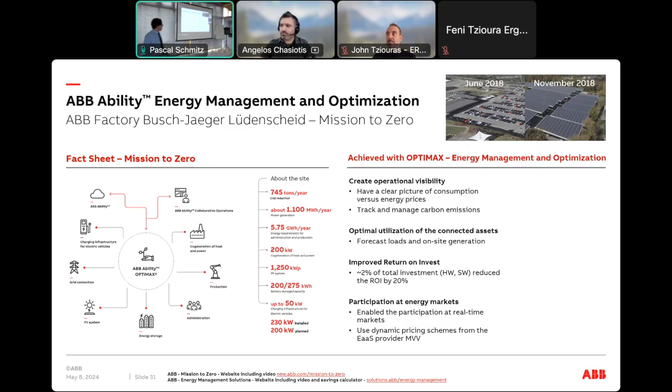Okay, so this section was about energy efficiency and how we want to optimize our energy systems. ABB is talking about digitalization and adding sensors and monitoring systems, but what I want to talk about is how we could optimize other aspects of the process. For example, how we can insert circularity and sustainable development into our optimization process.

So what I want to talk about here is how we can couple energy optimization with decarbonization, of course, with the sustainability pillars, and how circularity comes into play in energy efficiency. And then we will look at each energy system of the Neutron project specifically and try to see how we can optimize every system in terms of its sustainability pillars.

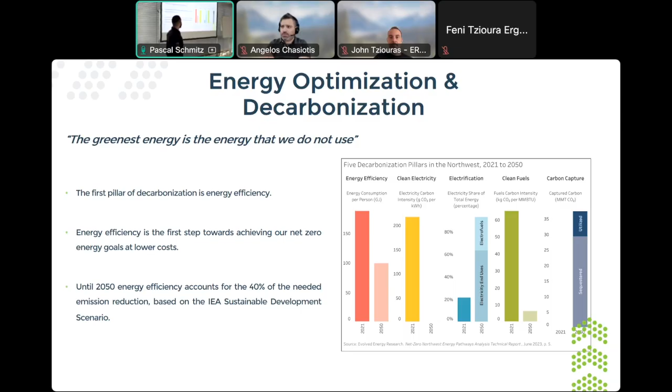So what I want to show here is that we don't only need sensors and digitalization to optimize our system. The social aspect plays a huge role in optimizing our processes. For example, if we have social education and social involvement in our project, we could decrease the energy consumed by the households, and then we can reduce the size of the proposed system. This reduces the cost, reduces the carbon footprint of the initial installation, and also reduces the energy consumption of the household itself.

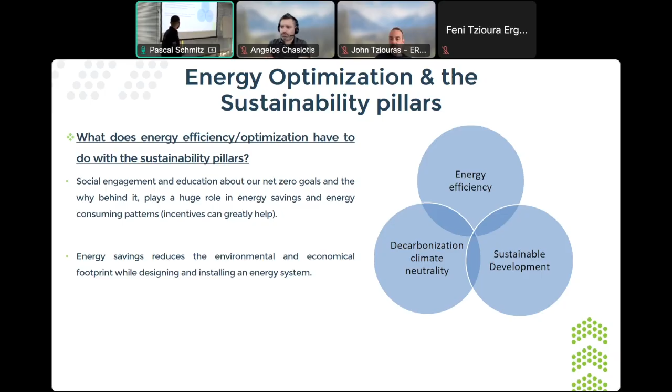And about circular economy, I think the circular model itself is a way to optimize the energy system in general. So reusing energy that was not used and was thrown away, having industrial symbiosis, for example, taking the output of a sector and having it as an input in another sector. The most simplistic form of sector coupling is waste management and energy production. So taking the waste and utilizing it as a source to produce energy.

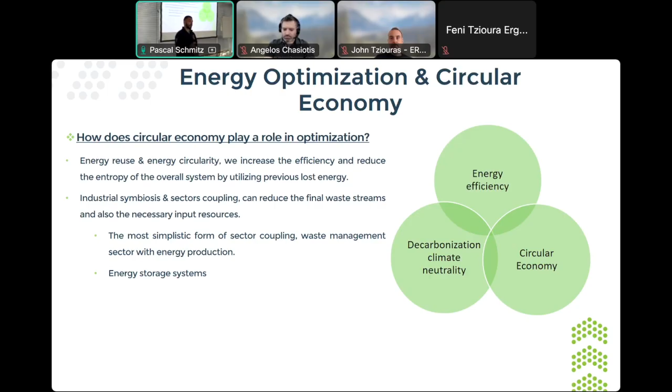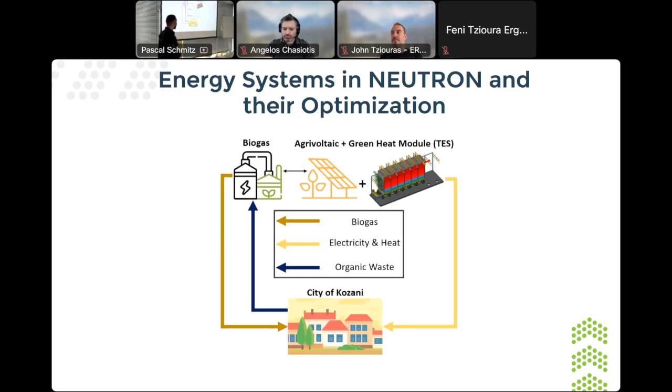Okay, so this is the proposed overall Neutron energy systems. Here we can see we have the biogas that we're talking about in work package 2. We have the agrivoltaic system plus the green heat module along with potential grid integration. So we could provide electricity to the city of Kozani, and if we have the available organic waste streams of the city of Kozani, we can then produce biogas. And of course, this biogas will be turned into heat and electricity as well. I tried to make the diagram as circular as possible because this is what we're trying to achieve here.

So if we go into every energy system specifically, what I want to show here is, of course, we can have a technical optimization in terms of the design. For the agrivoltaic system, we need to see the height at which we will install the PV. We need to see the number of strings. We need to see the distance between the strings, so we will have the needed solar radiation for the plants, for the cultivation. We need to see which cultivation is optimal for the shadow that we will have between the PVs.

And for the social aspect, what I wanted to showcase here is that if we want to optimize the potential of the overall system, then we need to have an energy community utilizing the cultivation below the agrivoltaics, because this means jobs in the local area, and this is also money given back to the people of the city of Kozani or any other city where we could utilize this sort of system. And to further increase the circularity of the whole system, we could utilize the crop residue of the agrivoltaic system in the biogas digester that we propose implementing.

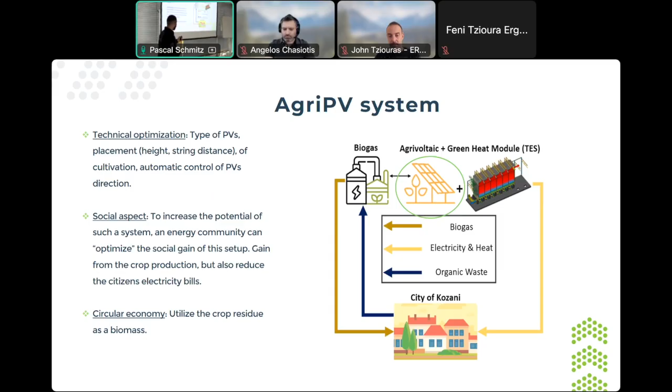Moving on from the agri-PV system to the biogas production. In terms of technical optimization in the design phase, what we could do to produce more biogas is study or assess the carbon to nitrogen ratio from the available waste streams that we have. So we will have the most optimal production in every digester that we design.

In terms of the social aspect now, this is a huge topic. If we take the organic fraction of the municipal waste and we assume that we want to utilize this type of waste for biogas production, then we know that wrong disposal, for example throwing plastic into the bins meant for organic waste, contaminates the waste. And what happens there is that in most cases, we cannot utilize this waste for biogas production or even for compost. In some cases, we can still utilize it in incineration plants, but we know that in Greece, we don't like burning waste. I don't know if this is a good thing or a bad thing.

But if we increase the social involvement and the social education, we can optimize the process of waste stream utilization. So if we could add some incentives for the people of Kozani or any city to throw away the organic fraction and only the organic fraction, not throw in plastic without caring about the process itself, then we can increase the potential biogas production from the organic fraction.

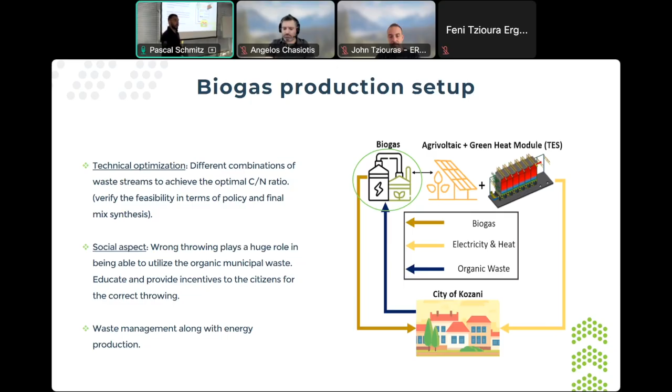So unfortunately, people have to go there and just rip the bags one by one so they can take the plastic out. And even then, we will have microplastics inside the organic waste. This cannot be utilized for biogas production or even for compost, at least for an efficient amount of compost.

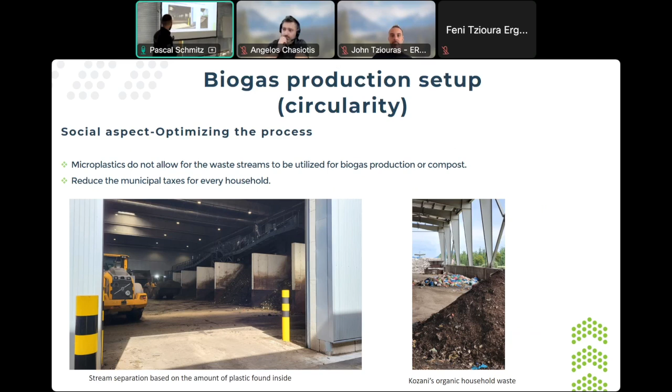Now moving on to the district heating system and the green heat module. In terms of technical, I'm not the right person to say this, but I think we had a really fruitful discussion before about this. What I wanted to showcase here is the social aspect.

Again, if we have informed citizens about what they will gain in, for example, increasing the energy efficiency of their houses, so saving heat, saving energy in general in the households, the first outcome would be that they would reduce their bills, of course. But the second outcome would be that if we want to, let's say, install a system like the green heat module, the overall capex and the overall carbon footprint of the installation would be reduced.

Because if we had a heat demand of, let's say, 10 units, and then we employed some energy savings in the households, for example, insulation or the windows and all that stuff, we could drop this down to, for example, 8. So then we would need to design a system for a reduced amount of heat demand.

And yeah, if we want to continue into the circularity of the system in the Neutron project, what we could discuss here is that the green heat module couples the two sectors: the energy generation sector and the heating demand from the households. So we can produce an extra demand for electricity that is not being used.

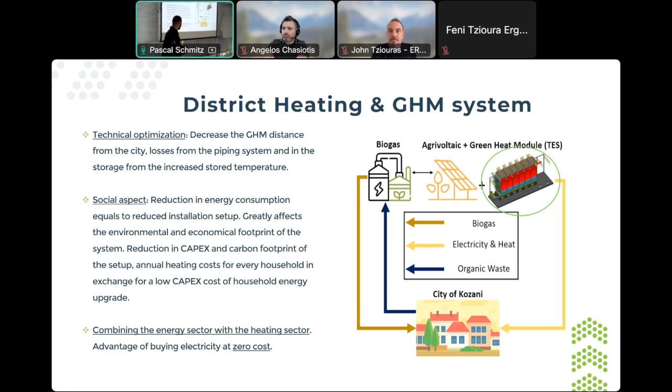So by optimizing the system and coupling the two sectors, we can basically increase the end user utilizing this electricity, buying the cheap electricity, turning it into heat and providing it to the households. This will not only decrease the cost for the households. So if we say that the current cost for the heat inside the household is 5 units, then we can decrease this to lower than 5.

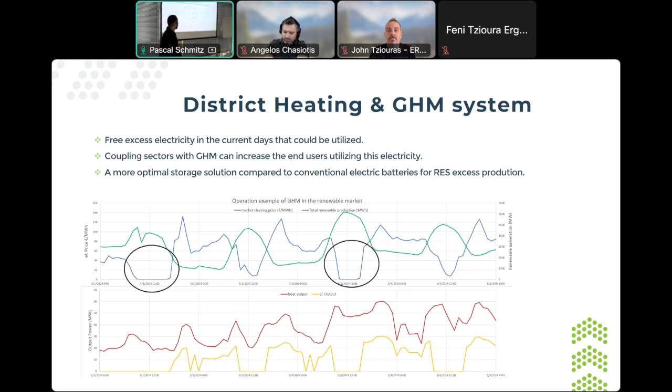Okay, so in a nutshell, what we wanted to say here is that optimization can not only take place with digitalization, with sensors, with monitoring systems. We can optimize our whole process from the beginning, from the people, not only from the citizens, but from the local authorities as well. We need to have educated people that can help us in the process, because, for example, the waste streams, the input that we have, is from the people. And also, as we said, the social involvement is really crucial for that.

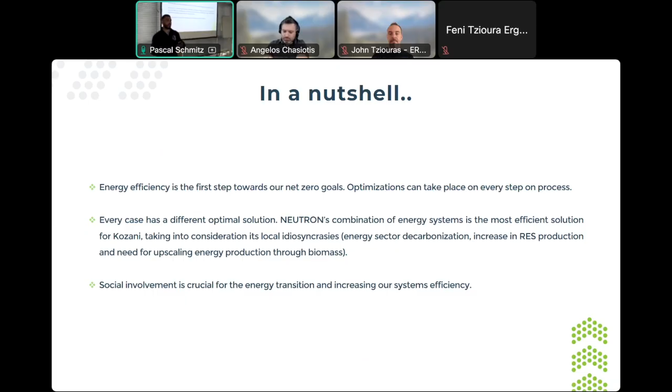And what I wanted to mention is that every case has its optimal solution in energy systems. So what we were trying to do is take into consideration the local aspects of Kozani in order to create this energy system that we see here. So it's the most optimal overall energy system for the city of Kozani and its local aspects. I think this is about it.